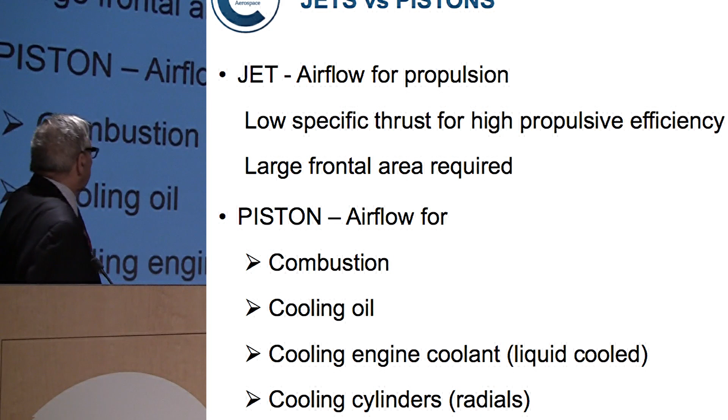So I said, getting the air in is not so easy. Now, the interesting thing is, if you look at the jet engine versus piston engines, in the jet, all the air flows for propulsion. And you want low specific thrust for high propulsive efficiency, and that requires a large frontal area. If you look at a big 777 engine, for example, with 9, 10 feet in diameter, that's to get this high propulsive efficiency.

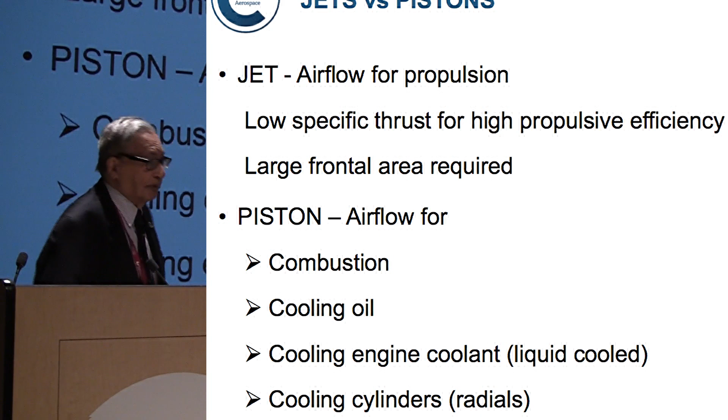Now, in the piston engine, the airflow is needed for combustion, cooling the oil, and cooling the engine coolant in a liquid-cooled engine, or cooling the cylinders with radial engines, really just like a large motorbike.

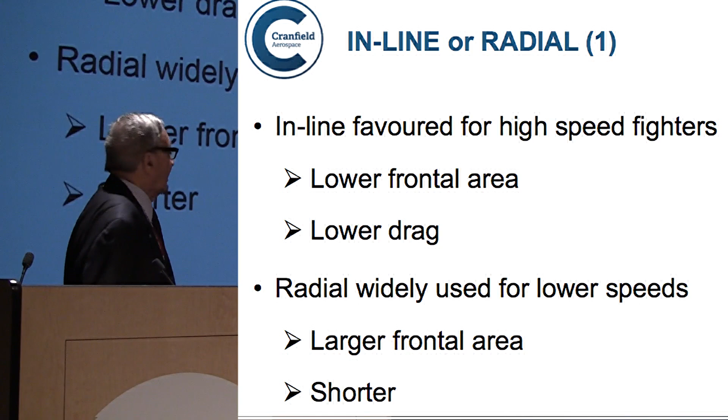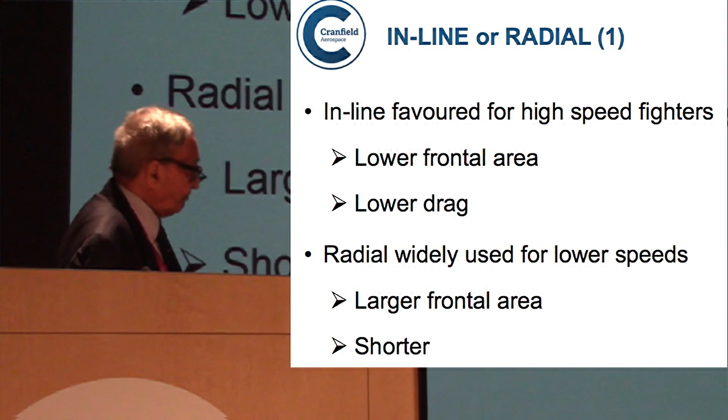Now, inline engines were supposed to be favoured for high-speed fighters because of the lower frontal area and lower drag. And the radial engine was widely used for lower speeds because of the larger frontal area, also the advantage of being shorter. Now, the thing was that we find that the British, the Americans, and the Germans all finished up with basically different design philosophies.

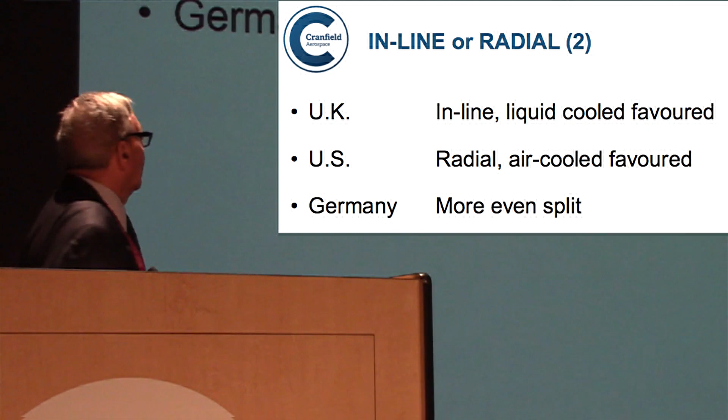In the UK, the inline engine was very heavily favoured and liquid cooled. In the US, exactly the opposite: virtually all radial engines and all air cooled. And in Germany, there was a more even split. In fact, a lot of the German aircraft that had inline engines, if you just looked at them, looked like radial engines because of the way the Germans developed annular radiators around the front of the engine. So there was a total difference in design philosophy.

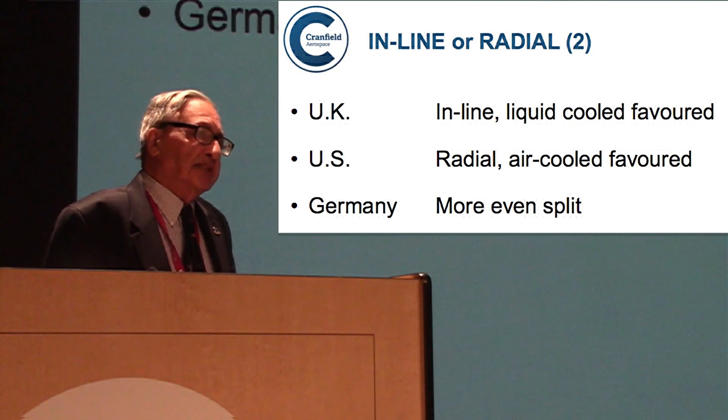Now, some years ago, I did a talk for the Discovery Channel. I got involved with a man from the US Navy who pointed out that the US Navy never operated a liquid-cooled engine aboard a ship, because they thought they were more complicated and difficult to maintain at sea.

Now, who were the principal makers? Well, in the UK, there was Rolls-Royce and Bristol and Napier. Napier were a much smaller operation than either of these. Rolls-Royce were much the biggest. In the US, there were three major manufacturers: Pratt & Whitney, Wright, and Allison. In Germany, Daimler-Benz, Junkers, and BMW.

Now, it turned out that roughly, to the best of putting numbers together, I could come up with: in Britain, it was probably about 80% inline to 20% radial. In the US, it was about 90% radial, 10% inline. And in Germany, fairly similar, possibly 50-50, 60-40, something like that, but not a clear difference.

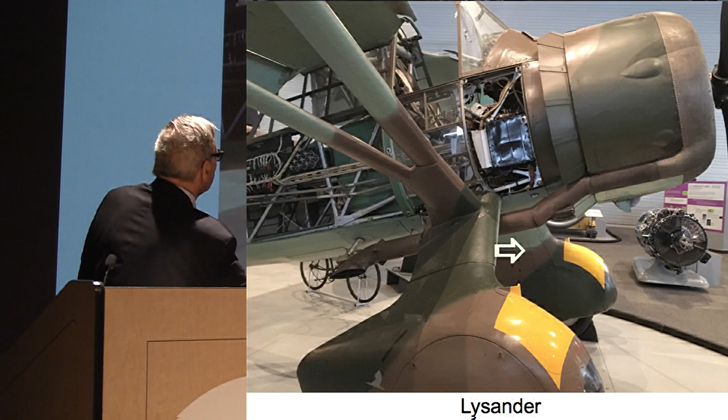Here's a typical low-speed Lysander. It's not a very interesting picture actually, but you see the exhaust is collected here and comes out there, and the air intake is some little scoop down here, and the cylinders are cooled by the finned cylinders, like you see in a motorbike.

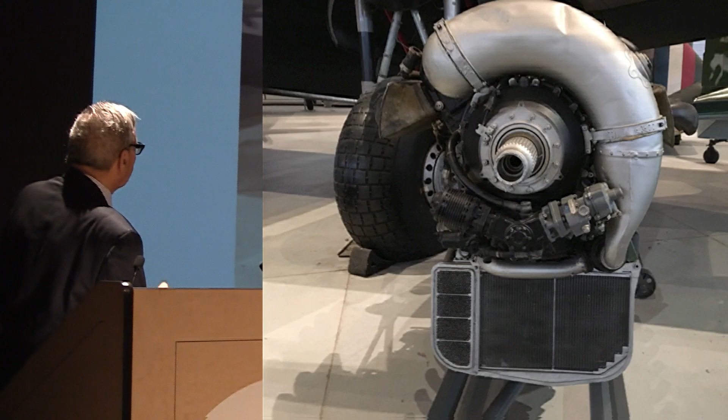Well, here, you see now, here's the engine here, the coolant is brought down here, and this chunk here is the radiator for cooling the coolant. This chunk here is the air for cooling the oil, and you can see the picture here now. Here is your radiator system here, and your nacelle, the big opening is down here, and the air intake to the supercharger is at the back of the engine here on all the British engines and the American engines. We'll see something different in a minute.

So that again shows the same picture, just to emphasize that that's the air required for cooling both the coolant and the oil, and that is the air required actually for combustion. So compare that to a jet engine, where virtually all the air coming in the front is going to propulsion.

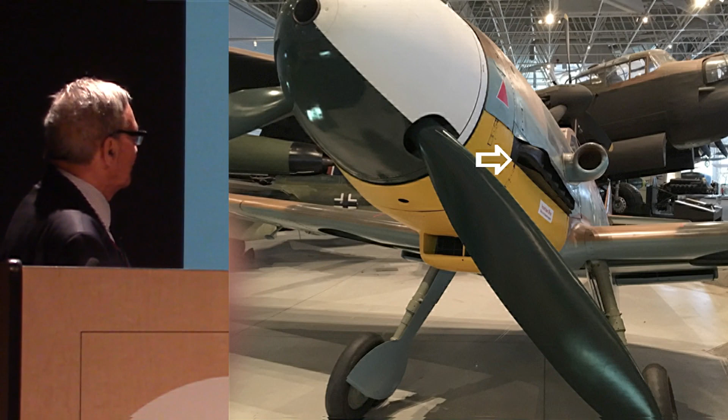I couldn't work out why this one was done this way. It seemed like a funny, odd way to do it. These were inverted V engines, so the exhaust was on the bottom. I puzzled over this, and on a second visit to the museum I found out why this was so.

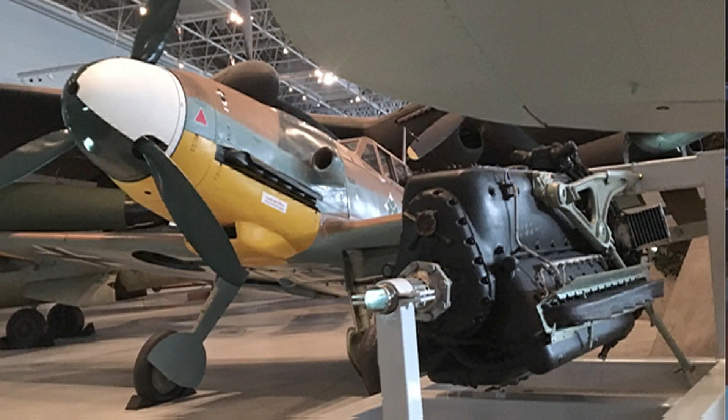This shows the German engine here, and the supercharger on this was not running in the driving axis. It was at right angles, and the flow came in through the side of the engine, with the supercharger at right angles, driven by some kind of mechanical device. You can see the intake there, and you'll see that on all manner of German airplanes, very standard as a fitting.

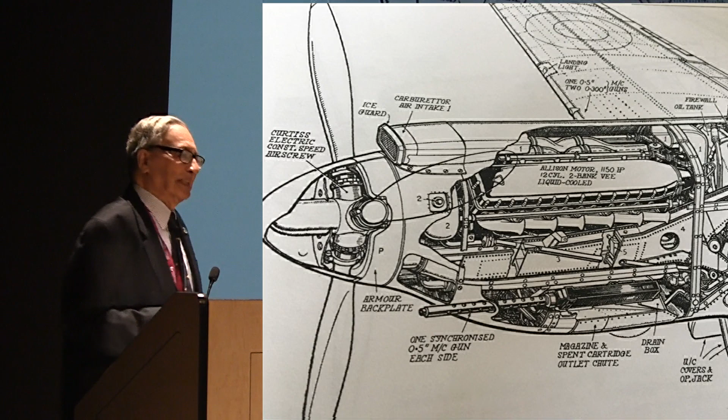This here is in fact the Allison engine, with the air brought in along here, and there's a downdraft carburetor here. One of the interesting things, if you look at it carefully, it says here 'ice guard.' To me, that was a perfect way to collect ice and block off the air into the engine. I think it must be designed by somebody who lived in Texas or somewhere where they didn't know what ice was.

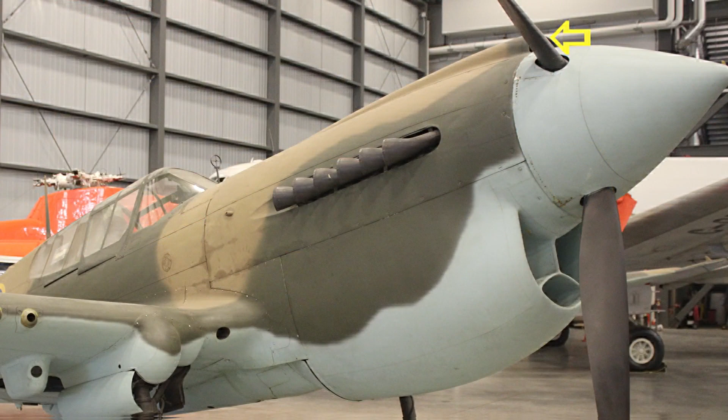That is the old P-40 Tomahawk. We did have one of these here once, it's probably somewhere in the junk hangar now. There is the air intake here for the carburetor, this is the coolant radiator, and that is the oil radiator there. So again, a lot of air was brought in, with basically three different functions and separate air systems for each.

Now, the picture of the Typhoon, I think it's a better picture that follows it. It's very dark, but this is this great big chin intake here.

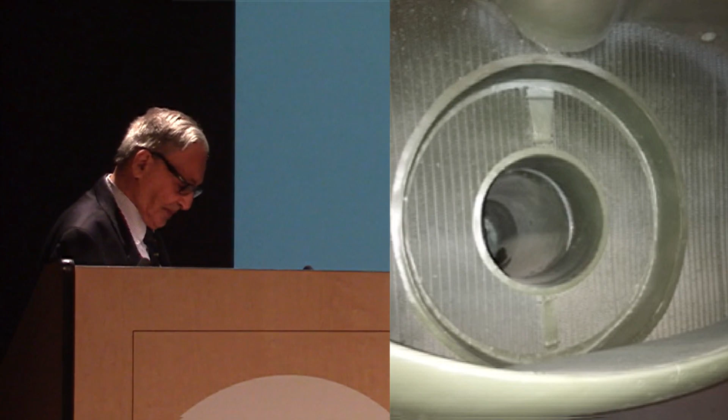And this is what's really interesting. This is the actual air intake system to the Typhoon. I sat back there and crossed over the rope and acted with the flash. I'm going to give you a picture of this here, this big chin intake under the Typhoon. This is this great big circular thing that hangs in there.

This represents the air going to the engine for combustion. This represents the air for cooling the oil. And this monstrous big annulus around here is for cooling the coolant.

We do also have a Napier Sabre engine in the collection here. The Sabre was actually the most powerful British engine built during the war.

Now, this interesting thing here, this is the Sea Fury, and there was this widespread belief in Britain that radial engines were not suitable for high-speed fighters. There was one man, Sir Roy Fedden, who firmly believed you could make a radial engine, cowl it properly, and get a high-speed fighter.

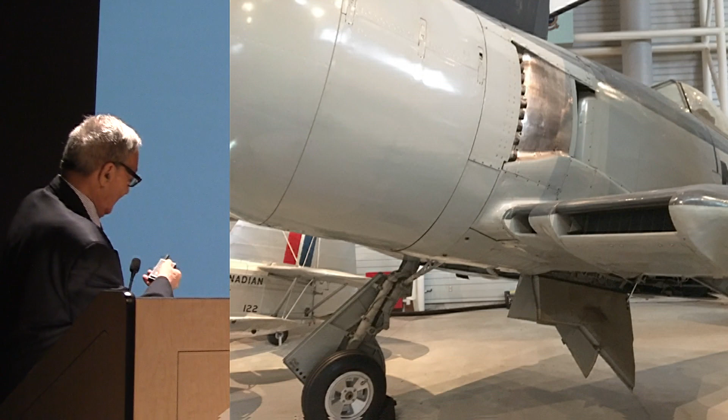So anyway, this design, with the exhaust taken out here, was basically stolen from the Focke-Wulf 190. And this here is the actual air intake to the engine. It's just on one side, I think - I don't have the pictures right in here - and there are two of these, one on each side, again for cooling the oil and the coolant.

And that's a beautiful, clean design. You can see that there. That's it. Particularly if you compare the frontal area of that with the Typhoon, which is also a Hawker aeroplane, this is clearly a much neater design.

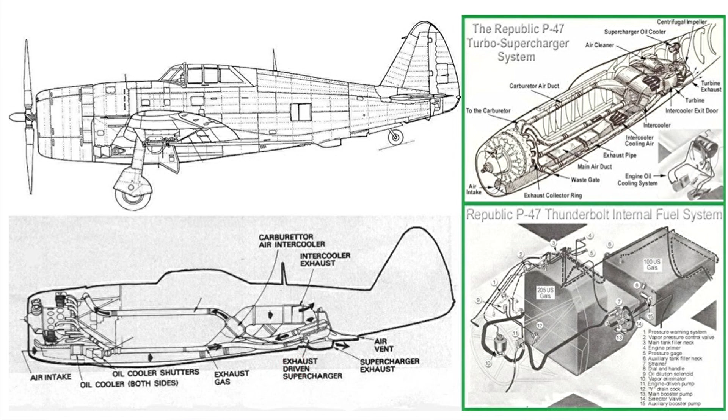What was really interesting was the Thunderbolt, which was the first one to introduce turbocharging. This is the best picture I could get. But you have the radial engine here, and the turbocharger is away back here, nowhere near the engine, and the air is brought back here through the turbocharger, exhausted there, and the air is compressed back up here into the engine. You can see the turbocharger exhaust here, and that was the first.

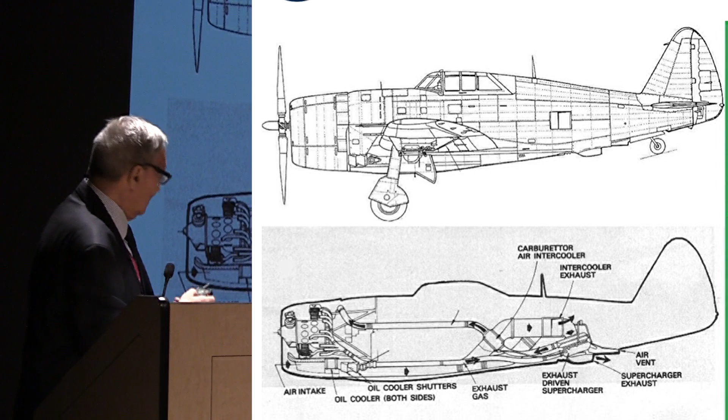It was Sanford Moss at GE who was the basic pioneer of designing turbochargers. And it looks, if you look at it now, like a daft way to do it, but it was a case of fitting it in somehow where nobody thought of it in the first place.

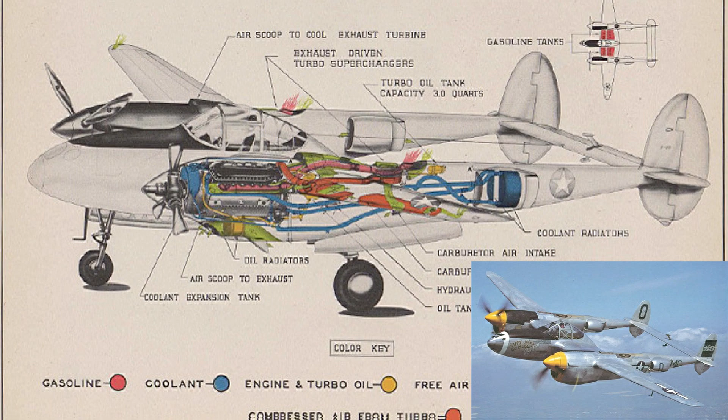The Lightning, Lockheed Lightning, was similar. The turbocharger is back here, and in fact, you quite often see in pictures of the Lightning from above the exhaust from the turbocharger here, but the bellows and the radiators, the cooling radiators in the Lightning, are way back here in the tail booms. So again, quite a complicated airflow path to get the air in and out.

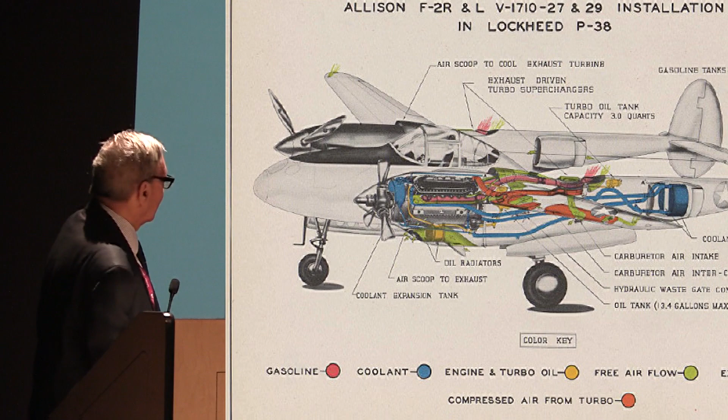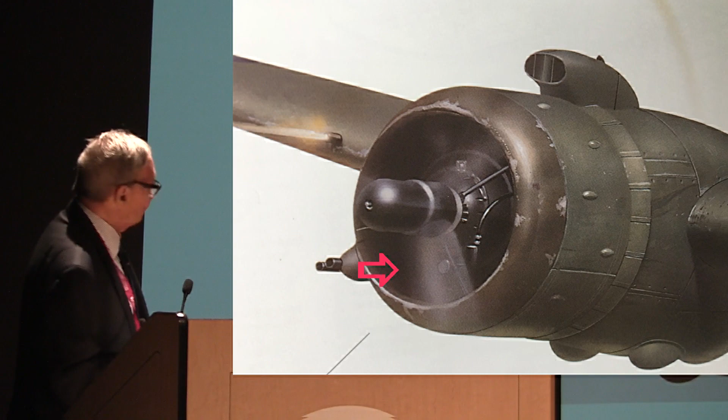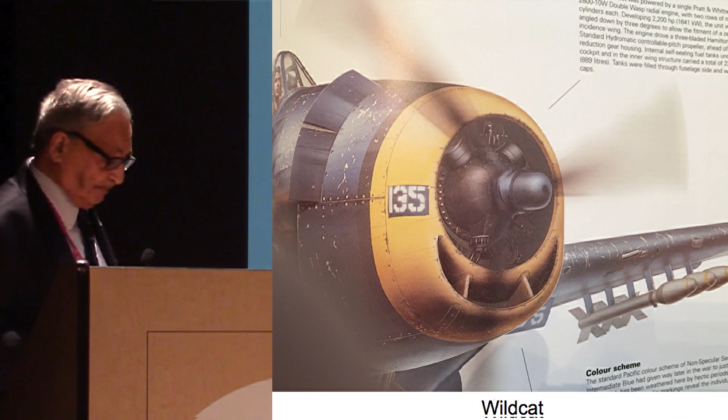Typical radial engine for low-speed aircraft, that was the Beaufighter. We had a Beaufighter here that I think is rack and ruin, but it might get redone someday. This is the air intake for the carburetor up here, and I think for both the carburetor and the oil cooling there. I showed you this picture earlier of the installation on the Wildcat, and that was a kind of standard installation on American aircraft like the B-29 and the B-17 and so on.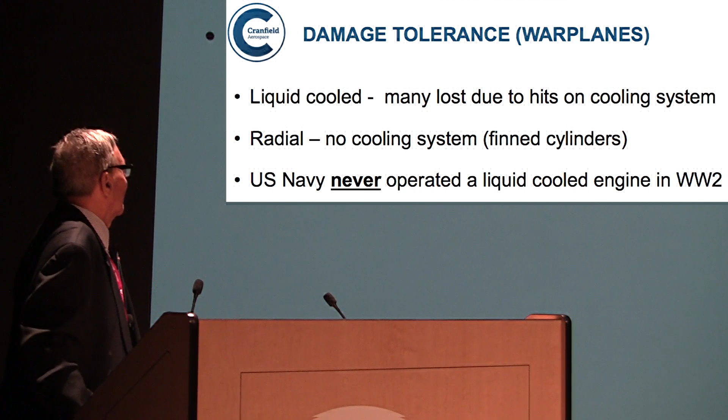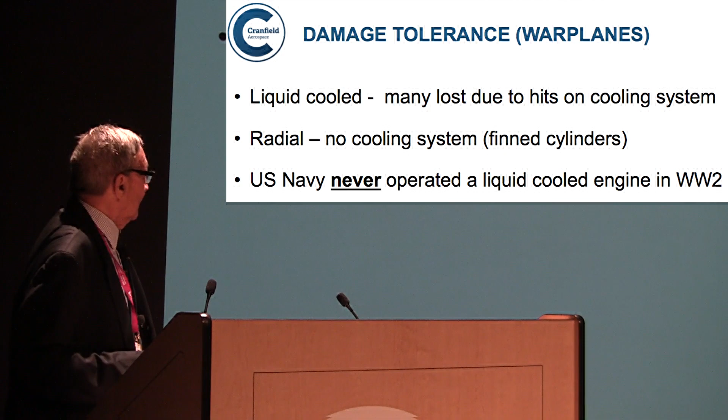One of the important things was damage tolerance for warplanes. Liquid-cooled engines were often lost due to hits on the cooling system. But radial engines had no cooling system, just finned cylinders. There were reported cases during World War II of piston engine aircraft returning with a cylinder knocked off and still running. The US Navy never operated a liquid-cooled engine in World War II.

The radial engine was much more widely used for transports, and both radial and inline were used for fighters and bombers. Some examples of inline liquid-cooled aircraft: Lancaster, Mosquito, Spitfire, Mustang, ME-109, Lightning. Radial-engined: B-17, B-24, B-29, Thunderbolt, Corsair, Beaufighter, and the Stirling. I didn't actually mention the Sea Fury there, but those are just some examples of these aircraft.

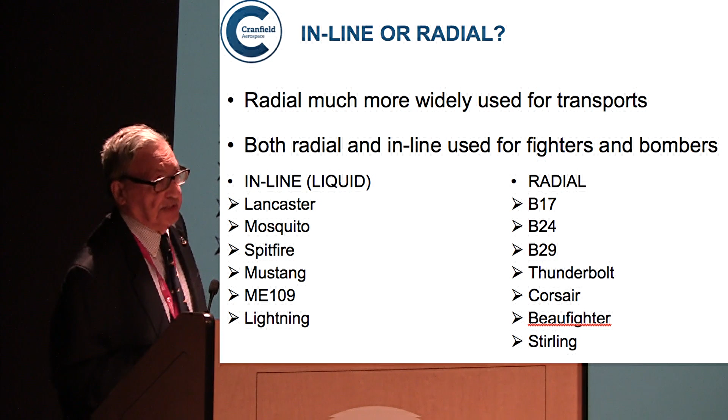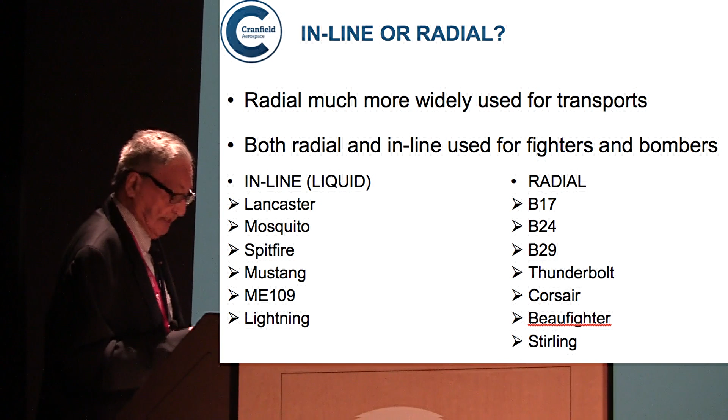The Americans really went all the way with the radial engine and much less with the inline engine, and that became what was used in transport aircraft, whereas the British had concentrated on inline engines. It turned out that for transport aircraft, the radial engine was a much better and more reliable solution. Many aircraft in World War II were shot down within 20 to 50 hours. The most sorties flown by a Lancaster was 120, so operating hours on engines were quite low, and many aircraft that flew 100 sorties would have had many engine changes. A good operating life for a piston engine in World War II might have been 200 hours. We're now talking about 40,000 hours before an engine comes off the wing.

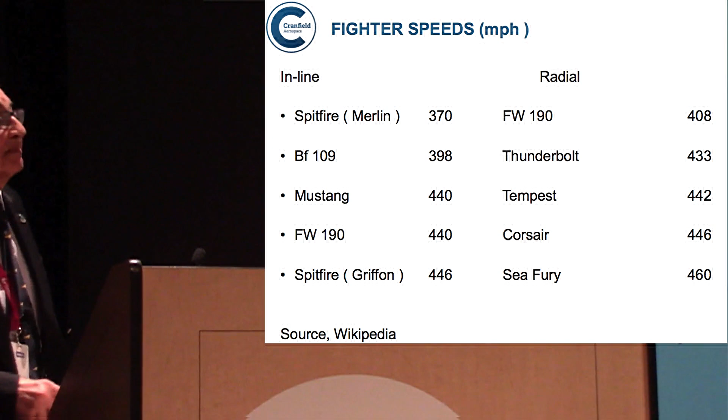Here's a comparison of speeds: starting with the Merlin Spitfire and the FW-190, the radial was faster. The BF-109 versus the Thunderbolt, the Thunderbolt was faster. The Mustang and Tempest were the same. The Focke-Wulf 190 and the Corsair were the same. The Griffon Spitfire and the Sea Fury, the Sea Fury was faster. So in the long run, there was basically no difference in the speeds of radial-powered aircraft versus piston inline engines.

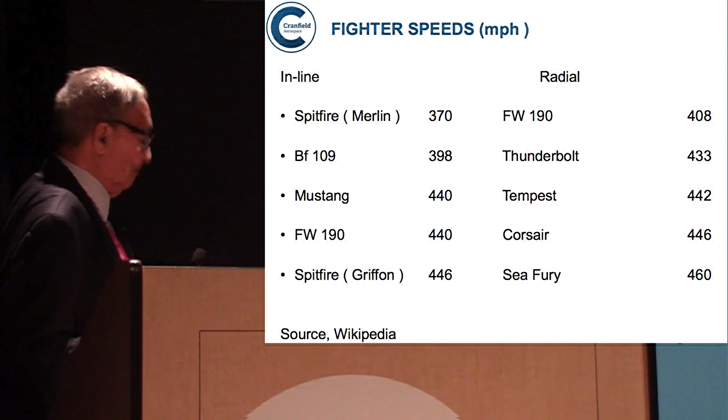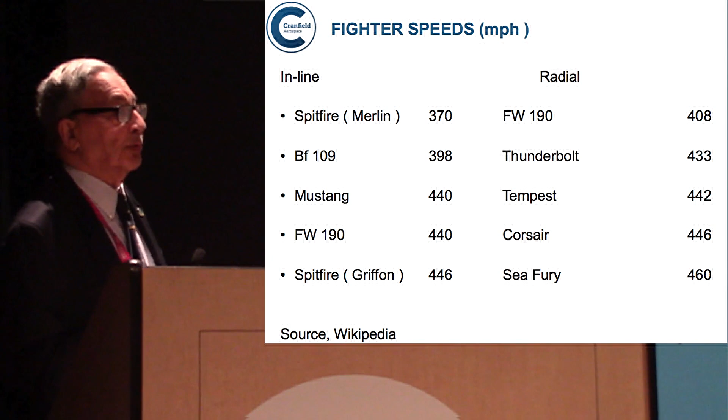So much for the idea that it had to be an inline engine because of low frontal area for high-speed fighters. Just look at the Typhoon - the Tempest was in fact radial-engined as well. There were two versions of the Tempest, one radial, one inline. I took all this from the same source, so it was as neutral as it could get. The final conclusion is there was really no difference in the speed of radial engine fighters. In fact, one of the later Focke-Wulf 190s, the long-nose version, was actually an inline engine, although it looked like a radial.

There was no further development of these engines after World War II. The radial was used for all the US civil transports - DC-6 and DC-7, the Stratocruiser, the Constellation. That's largely why, immediately after the war, the British started looking at gas turbines - the Dart and the Avon - for the Comet and the Viscount. They were actually first into the civil jet field, but that didn't last for all that long. So that's all I've got to say.

I'd be glad to answer any questions, and we'll see if you think what I said was a load of rubbish.

Any questions? Okay, well, thank you very much, Herb. Sorry, I snuck in behind you there.

Thank you very much for the great presentation. As far as I know, the Bristol Beaufighter is still in the restoration hangar - they're doing a complete rebuild on it. I believe they finally got engines, traded with another museum that had some. Eventually we'll see the Beaufighter back in its glory, but you're right, the Mosquito will probably stay in the junk hangar.

And with that - as I said before, in Glasgow they used to say, don't clap, throw money.